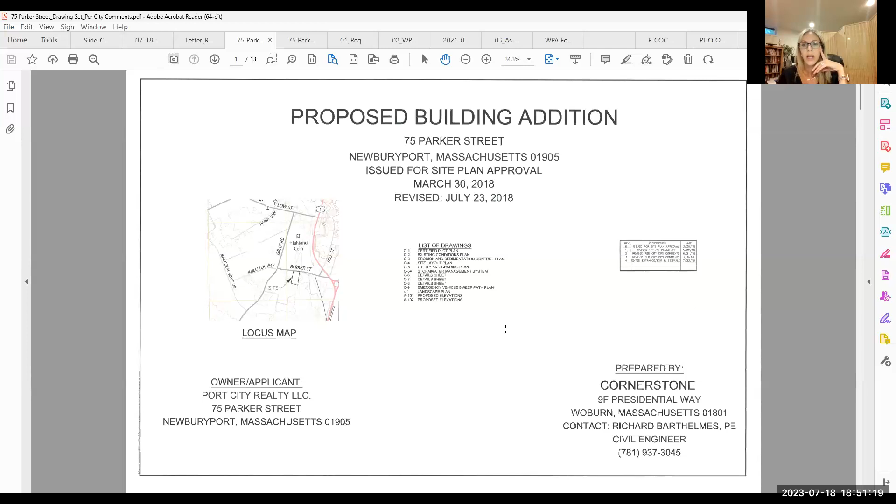So Julia, is this the property that was going to be turned into something different by the brewery? No, that's 79 Parker Street. Oh okay, it's a good question because they're really close to each other. This is 75, an existing building. Here's the parcel. 79 is further up Parker Street on the corner, there's White House and that whole building.

This is just an existing 1-story concrete block building that they wanted to put an addition on and add parking and stormwater management. So it's a much smaller project. Here's the proposed. This is the existing, and here's the proposed. There's going to be a building addition in the back.

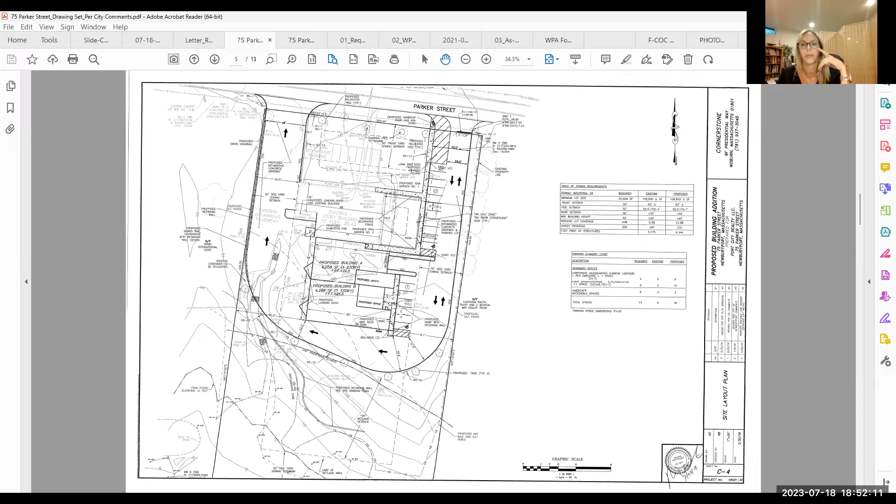Again, nothing has changed. This is still exactly what they want to do. They just, because of various reasons including COVID, weren't able to start and are hoping to start now. So rather than make them refile all of this, we have the order of conditions. They're asking if we can retroactively extend it to when they did the planning board. So they're only asking for a 2-year extension, but I would recommend that we give them a full 3-year extension.

Was this Bob Germanara's land? I think this was the Germanara property, if I remember correctly, but I don't think he's involved in this. So it's a car repair place now.

So if we're doing a retroactive extension, should we go back to when it was, should the 3 years start back when the other one expired? I actually calculated when it would have expired, given the tolling period, the COVID period, which would have been November 28th, 2022. So that's when we can date the extension.

It would be extended 3 years from then. Okay, well that's fine by me.

We need a motion to do the extension. So moved. Second. Roll call: Steve Moore, yes. David Vine, yes. Carol Wagon, yes. Dan Warshaw, yes. I vote yes.

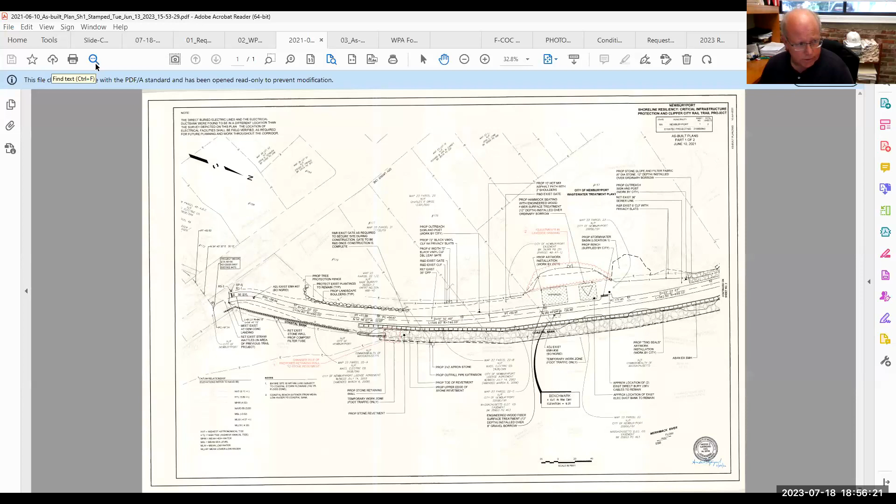16 feet of it was actually changed from a wall to a stone revetment. That was because during construction, it was discovered that the buried electrical line, I believe a 13 kV line, was really close to the excavation. So in order to avoid disrupting that utility, that change was made in the field. So that was one change.

There was a little bit of landside grading right off the top of the path that was done to incorporate a flatter area that was graded to incorporate the shipwreck structure, and then a hammock seating that was done during construction. So that was the second minor change.

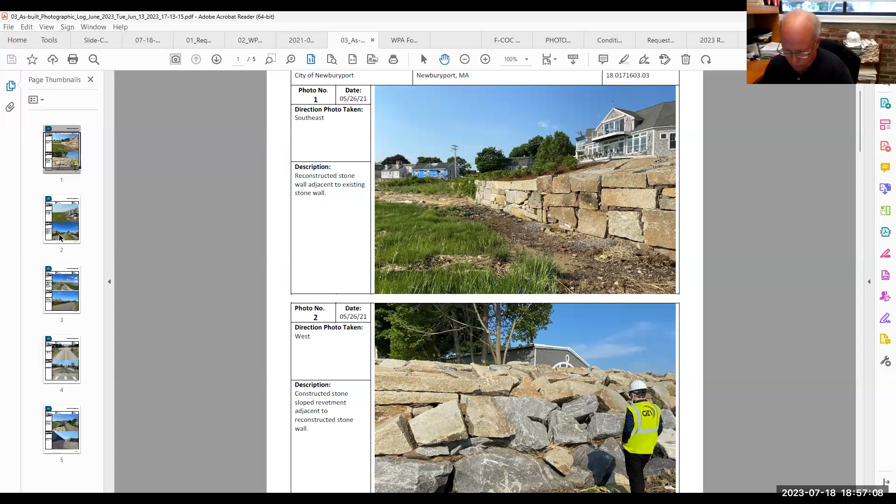And then the third one was the stormwater basin located on the land side of the walkway. That was adjusted by having some crushed stone fabric put in, and then also on the land side slope, that was also stabilized with fabric and crushed stone. I think that's what you see right in that photograph, photo 10.

So with that, the city's looking to close out this project. Okay, anybody got any questions? So this doesn't include the extension over off of Parker Street? Is that considered a separate project? That's correct. This is not included in that work.

Okay, I'll make a motion to issue the certificate of compliance. Second. Roll call: Steve Moore, yes. David Vine, yes. Carol Wagon, yes. Dan Warshaw, yes, and I vote yes. Thank you. All right, thank you.

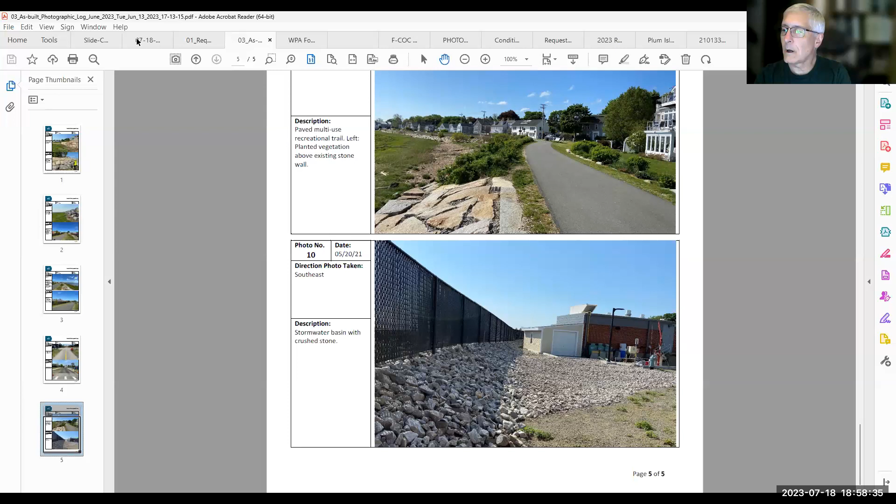Okay, next item. Robert Wolsick, Strem Chemical, Mulliken Way, request certificate of compliance.

Okay, that's the wrong one. Here we go. Let's see, we've got Matt Steinell here. Matt, I'm going to move you to be a panelist. Matt can explain this project to you guys, which I think was done quite successfully.

Good evening, Matt. Good evening.

For the record, Matt Steinell from Millennium Engineering, here tonight representing the applicant Strem Chemicals in their request for the certificate of compliance. The commission may recall we were back before you a couple years ago with an application to install a new transformer pad and transformer on the paved surface next to the building, and then a conduit was going to be excavated connecting an existing utility pole on the property to that new transformer. Recently we were contacted by Strem to come out and do the as-built, as they had indicated the work had been completed. And when we did the as-built, we found a couple minor deviations from the plan.

But when I spoke with the engineer in the office, Brian, he said he had been aware of these changes as they were happening, and had communicated some of this information to the commission through their agent. Before you tonight is the as-built plan. And the deviations that I'll point out, I don't know if you can see my cursor, or if it's Julia's screen that you're seeing, want to show me where to zoom in?

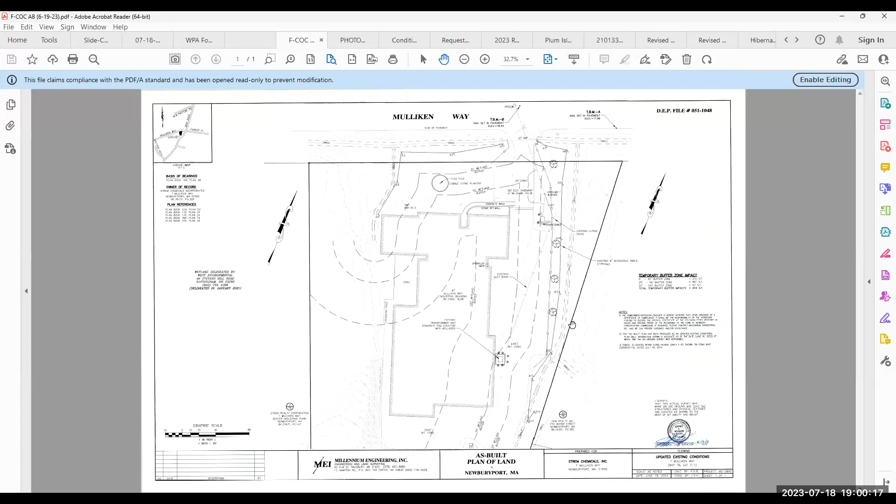I can, just to that right-hand side of the building there. Yep. Perfect. So kind of to the lower part of the screen there, you can see the square where the transformer is. Originally, that was about 15 feet towards the north of where it is. In the photo package that we submitted, I think what happened was there wasn't enough thought put into the placement of that proposed pad. And in one of the pictures, you can see there's actually a door there. So I think they just had to shift it in order to not block the door. And so that pad got shifted, kind of toward the bottom of the screen there, about 15 feet away from that corner of the building.

In addition to that, when the utility company came out to actually make the connection, they determined it was necessary not to come off of the existing utility pole there. So there is another transformer just a little bit further up. Right here. Right there, yep, there's a transformer there. And just behind that, they installed a new utility pole where the conduit was originally going to come off the pole a little bit north of that and cut in front of that transformer. Now it's overhead to the new utility pole and then comes behind that transformer through the paved section.

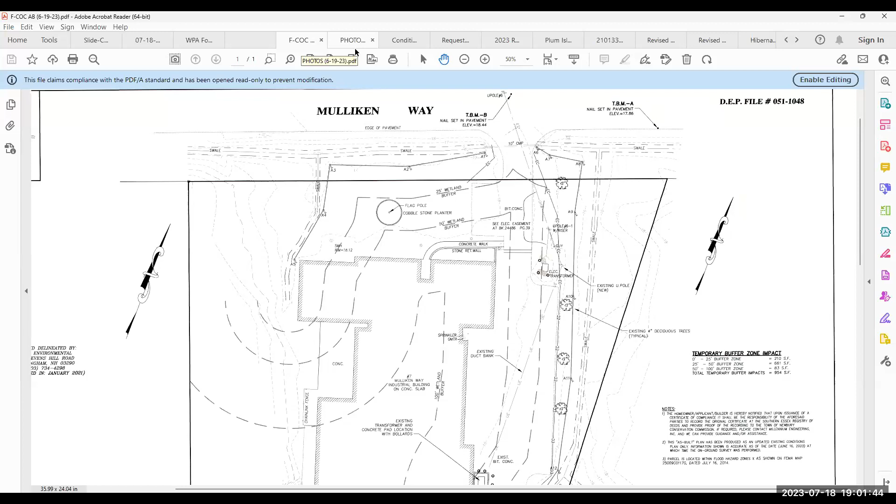So the two major deviations are the 15-foot shift in the pad and the installation of a new utility pole that was needed to satisfy the utility company's requirements. Beyond that, the impacts are relatively the same. It's a trench through the paved area. When they were done, they repaved it.

You can see in that bottom photo there. And in that top photo, it's a little hard to see, but if you look just to the right of the green transformer, you can see the open door there.

Beyond that, I'm happy to answer any questions, but it appears to be done in reasonable close conformance with the plan.

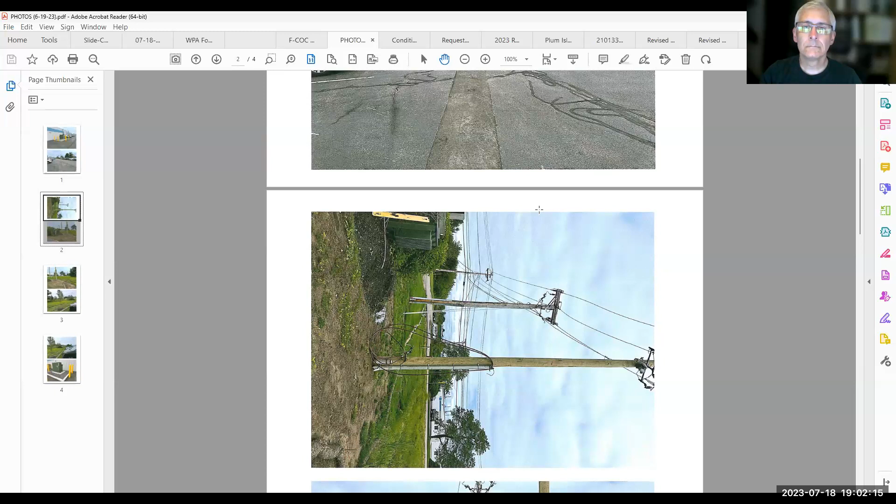Okay. Anybody? Motion to issue the certificate of compliance? Second. All right, roll call.

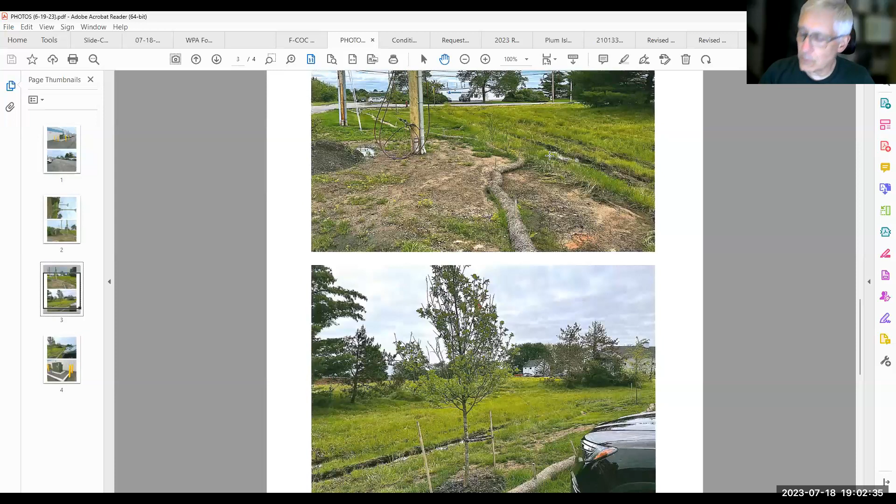Steve Moore, yes. David Vine, yes. Carol Wagon, yes. Dan Warshaw, yes, and I vote yes. Thank you.

All right, next item, David Smith, GZA Environmental Inc., 0 North Reservation Terrace, Plum Island Beach. Request for certificate of compliance.

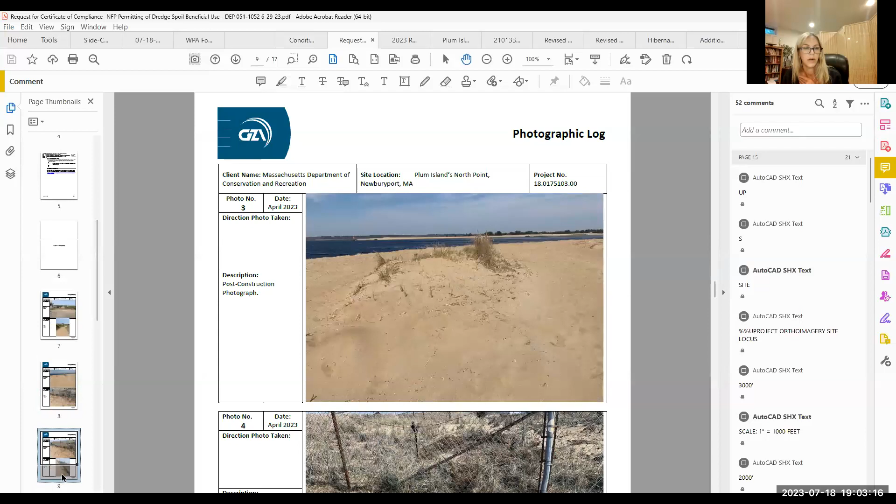Yes, okay, so here we go. David's already still over here. Is there anybody else we need? I don't think so, again. Okay, so David, I've got the request, I've got the photos and your whole application, your whole request here. You can just let me know how you want to quickly run through this.

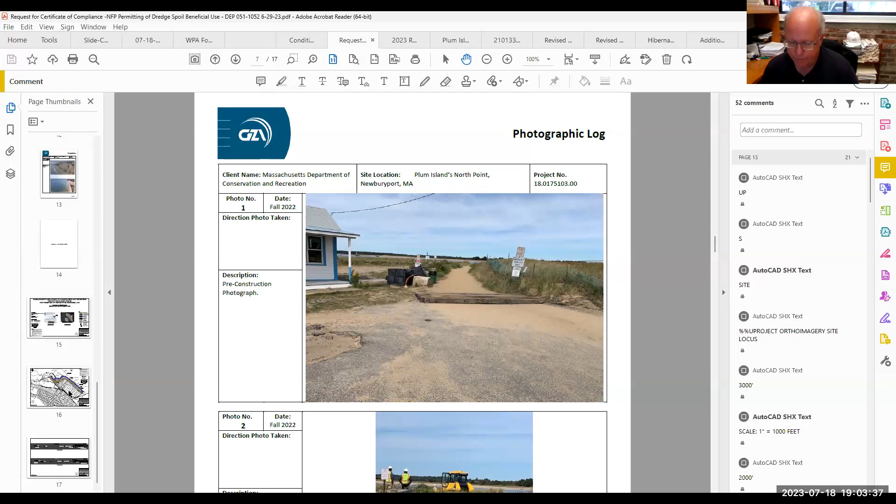Sure, thanks Julia. David Smith from GZA, 144 Elm Street in Amesbury, here representing the Massachusetts Department of Conservation and Recreation, DCR, for the non-federal sponsor or non-federal project permitting of dredge spoils beneficial use. So this is the dredging project at North Point, Plum Island.

The project was completed on or around April 7th of 2023, and an as-built was required as part of the order of conditions. So we went out there and performed an as-built survey shortly after the completion of the project, and that's submitted as part of this request for certificate of compliance.

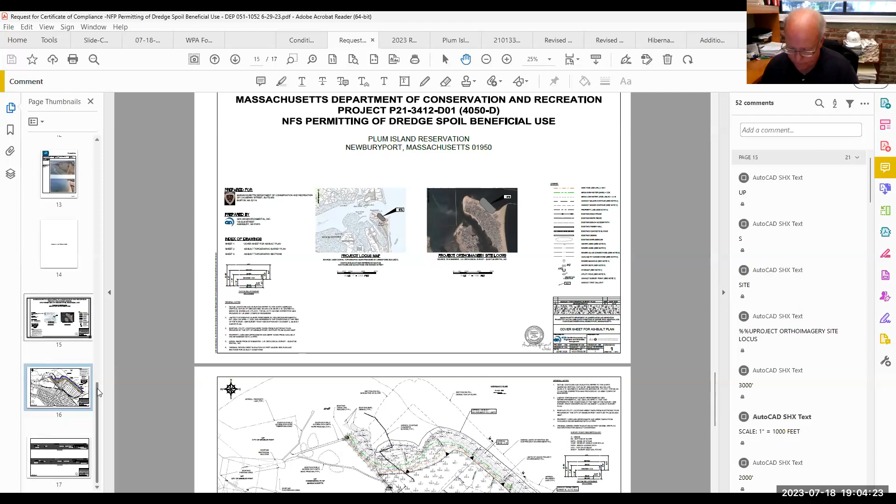In addition, in the cover letter there were notes of some deviations, one of which, and I think most folks will know this from being involved in this project for many years, is that originally it was 290,000 cubic yards of sediment that was going to be dredged and placed at North Point. From the Army Corps of Engineers, their volumes totaled 214,625 yards, so it was a reduction of a little over 75,000 cubic yards. That's the first change that occurred.

The second change is that the Army Corps of Engineers, if you recall, this is an Army Corps dredging project, and their project was to dispose of the dredge spoils behind the South Jetty Spur. DCR was the non-federal proponent to take the rest of the material, the dredge material, and place it further beyond the Corps' project limits, basically what you see in the drawing in front of you.

The Corps, during the course of the project, increased the elevation of this nourished area. It was originally proposed to be at elevation 6.5, NAVD 88 datum. They raised it 2 feet. So with that, there was a reduction in overall square footage of the nourished area, and that was also reflected because of the reduction in volume.

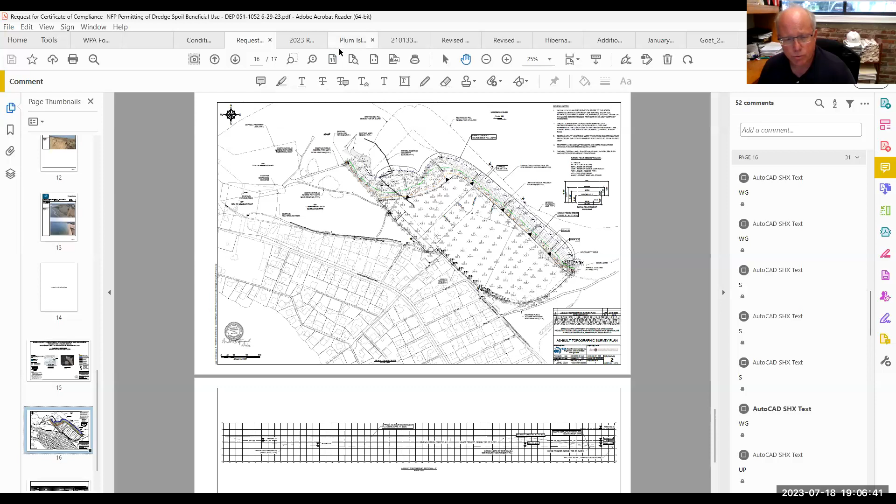This was brought up in a meeting during construction, attended by Julia, and we're just basically capturing this as the certificate of compliance. The Army Corps of Engineers, I believe, also provided the pre and post-construction plans and photographs, the same photographs we've included with our application, and I believe they also included that in the submission to the city's Conservation Commission as well. So with that, we're just requesting to close out this order of conditions.

Do you have any idea how much of what they put there has disappeared already? Unfortunately, I don't. We only did the as-built survey shortly after they completed the work. We only have that survey data. We have not surveyed it afterwards.

Is there any downside to the certificate of compliance, in that if any other work has to be done here, would it be through the previous order of conditions for the bags and stone project, or is that one still open? Is there any reason not to complete this or the other one? I'm not sure, Dave, about the old one, if that order is still open or not. I would imagine it's probably since expired. Any future work is going to have a new filing.

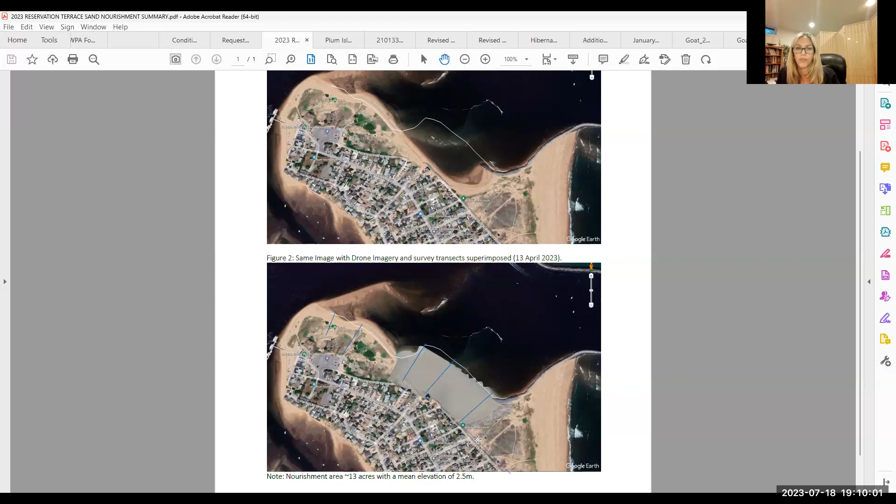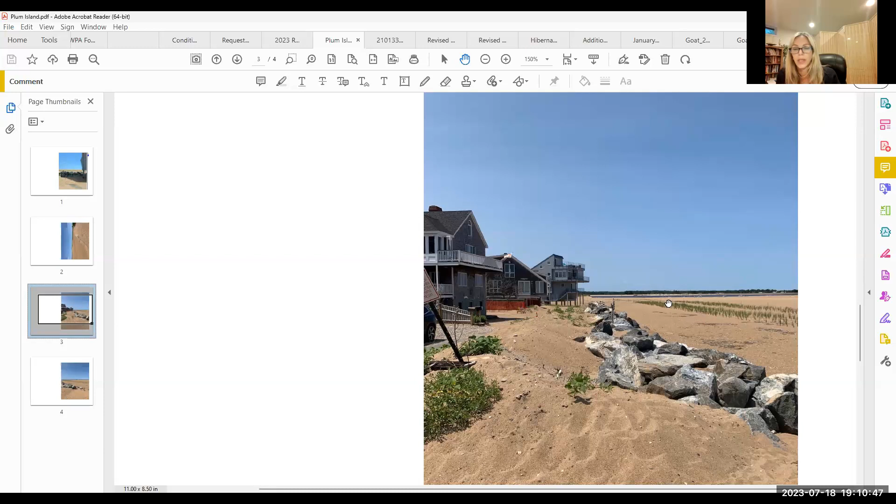Let me see if I can get another picture — sorry these are so off center. Here again, the plantings have been coming in, nice and green and healthy. And here's just another shot of that. But it is pretty flat, and this high tide does come up pretty high, so we'll have to just keep our fingers crossed.

I'll make a motion to issue the certificate of compliance. Second. All right, roll call: Steve Moore, yes; David Vine, yes; Carol Wagon, yes; Dan Warshall, yes; and I vote yes.

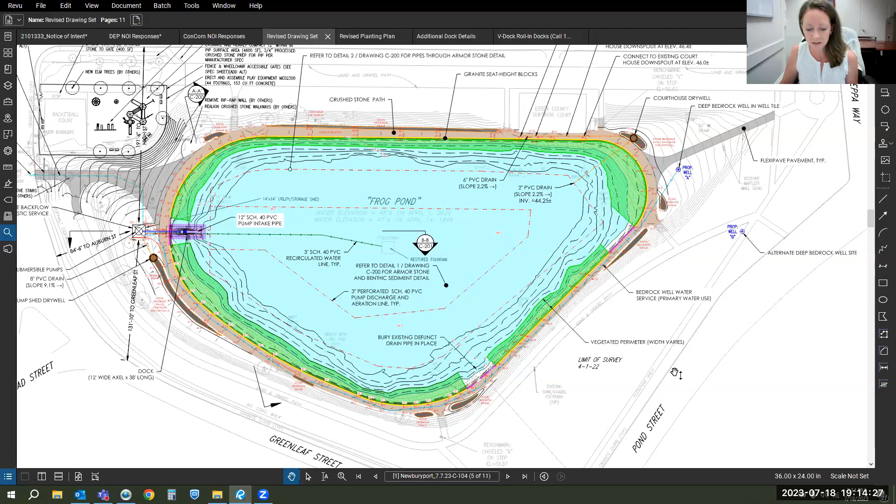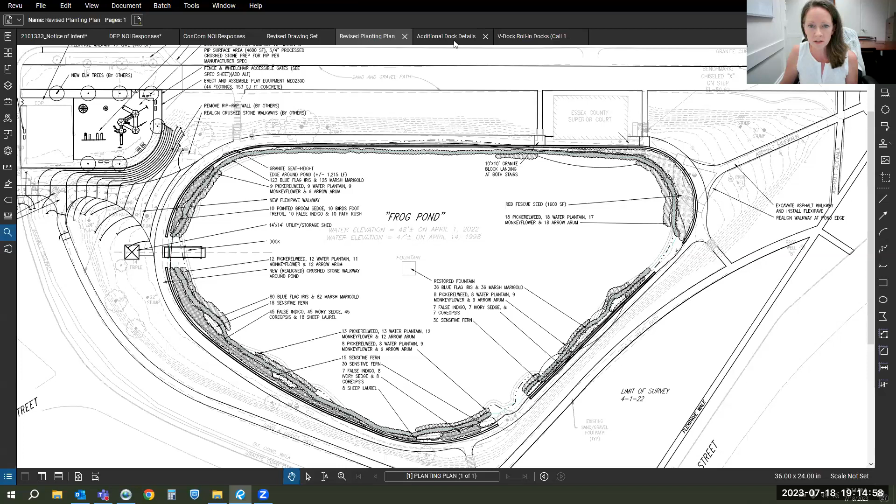I'll hold that piece for now if you have questions. The second item requested by the commission is the revised planting plan, and this more or less directly responds to the grading. Last time you saw colored bands of species indicated by elevations above the water level. This is a little bit greater detail, still utilizing all the same planting species proposed last time, but giving more detail as to exactly where they're going to be placed. The final item requested was additional dock details, so we've provided that information in the packet.

We also have a video that shows how the dock is moved in and out of the pond, if there's any desire to see how that's going to work. But in trying not to take too much of the commission's time, I'll leave it at that for now, and we're open to any additional questions or details you might request.

I'm still curious how the dock and the axle for the wheels is going to clear the intake pipe. Krista, do you have that detail that shows the cross section? What sheet is that on? That's our first detail sheet.

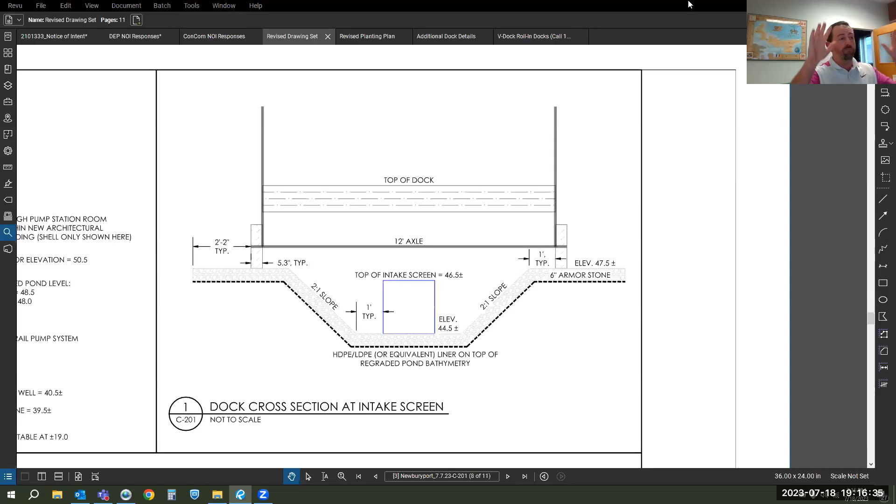So what we did, and again this was something we presented earlier at more of a 20% construction document level, and now we're a lot closer to 100%, since the intent is to go to bid as quickly as we can. The intent is that we've sunken in the intake screen and pipe so that it falls below the axle. Then basically there's a ramp that straddles the intake screen, and the ramp is above the intake screen itself. So if you could zoom out a little bit.

Yeah, and then scroll over further to the right. So there's a ramp that actually exists, and if you zoom in a little further, thank you. So what we've done is graded the pond such that the wheels are not on a track, but on an ample ramp of stone on either side, and the intake pipe is set back inside this ramp. So as we pull the dock out and push it back into the pond, the wheels will straddle the intake pipe but also stay above it, so the wheels stay on the stone ramp that's higher than the intake notch or niche we've created in the grading plan, so the axle doesn't hit the top of the pipe or the intake screen itself.

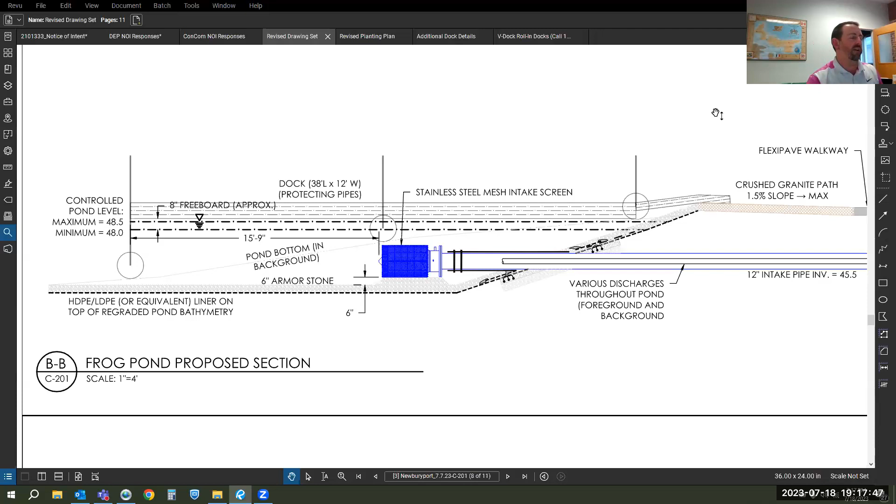If you go a couple sheets back, actually, right here, perfect. You can see this is a graded niche where the intake pipe is set back into the slope closer to the edge, but we have a ramp that is stone lined, the same stone we're proposing to ballast the liner on. That stone will act as a ramp to pull the roll-in dock in and out.

So after reviewing this, we took it to heart and looked at it really intently. We came up with a pretty good solution, I believe, where we can protect the intake pipe and screen with this sheath of stone, and the outer edge, which is higher than the intake pipe and screen, will easily slide in and out of the pond, straddling and going over the intake pipe without the axle hitting the intake screen or pipe itself.

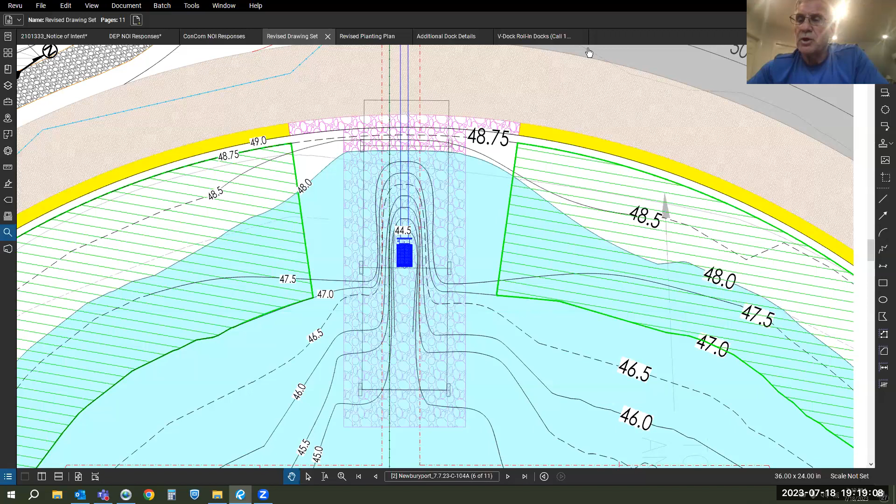Okay, and what would be the mechanism I saw on one of your earlier slides, something about 1,400 pounds or so? Is there going to be like a come-along that goes with this? I think it's time to cue the video. I'd like to see the video. Is it okay if I play a YouTube video for all you folks? Somebody give me a wave if the audio isn't working.

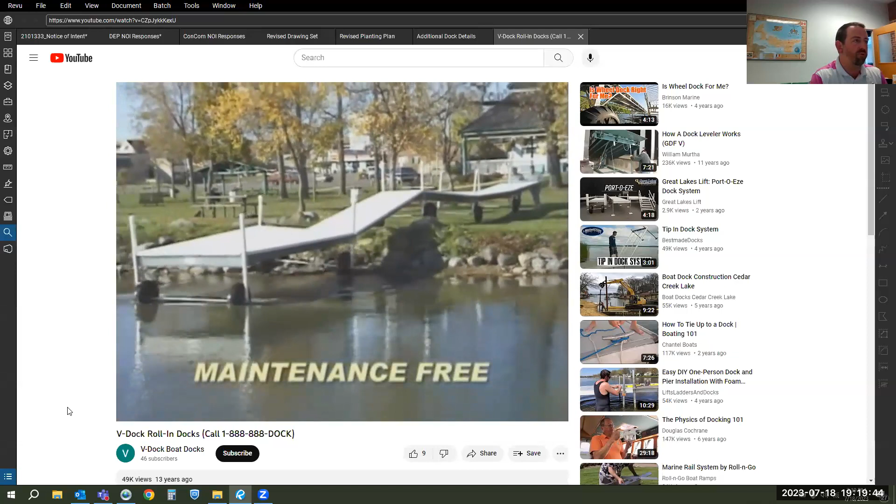So it's easily pushed in, there's two people doing that. It's hinged and on rolling wheels so they're rugged and can slide in, and those wheels would slide on the stone ramp we're proposing on either side of the intake pipe. Once the dock is in, it gets locked in place.

Needed the audio. I figured our discussion would be more important than their advertisement.

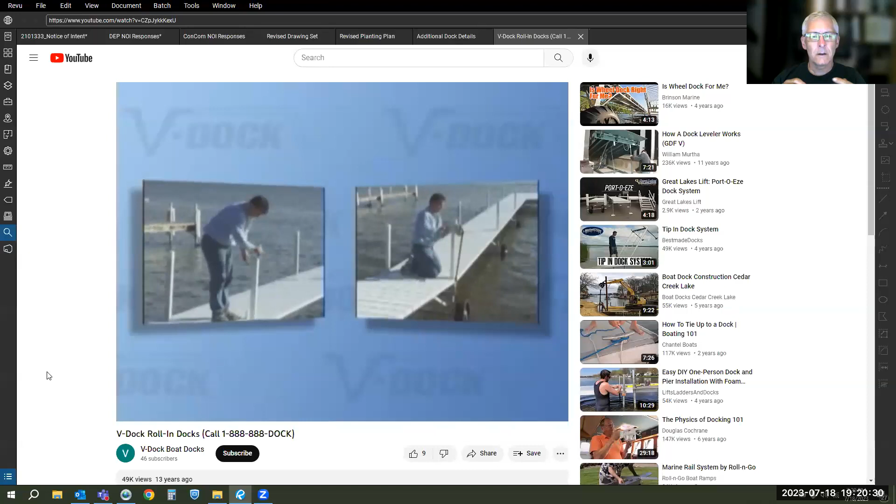Okay, one question I have is the stone ramps - won't they start settling and or falling over with multiple runs of this dock back in and out?

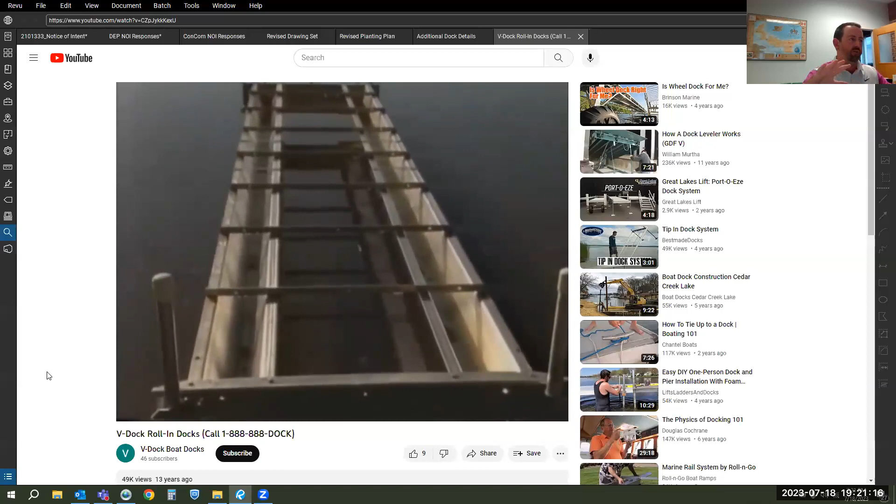Well, there would only be 2 runs in and out per year, so it's not repeated to the point where there would be significant fatigue, so to speak. That section in particular would be reinforced with additional stone so that it's not just a thin layer. It's graded and filled in a way at that location to withstand the force of the rolling of that dock on that ramp.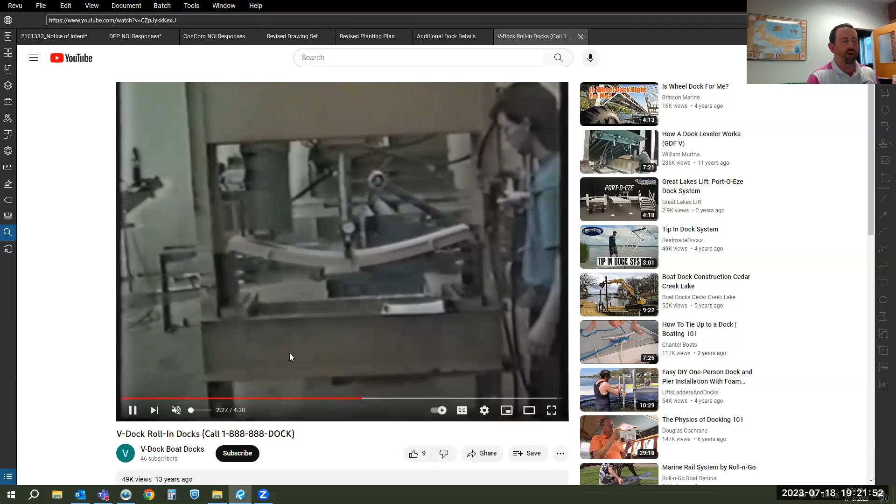It's a wide enough track so it's not like the wheels are right on it - there's enough stone to cover the wheels, and it's not like it's on a fixed track. There's enough give and play, horizontally speaking, to wheel this ramp in. So I don't expect it to rut out or slough off, especially because of its weight, how the weight's distributed, and because the wheels are wide and can distribute the weight properly. So I don't see that as an issue here.

Okay. Do you think that now that the intake is below the level of the bottom, sort of submerged, that debris will accumulate that will need to be removed?

So it's actually not at the bottom itself - the intake is not at the bottom. The bottom of the pond itself is still 6 inches below that. So the cross section we saw on the other one, that's the cross section through the screen itself. There's actually still 6 inches of freeboard, or space, between the bottom of the intake screen and the actual pond bottom.

We added additional stone underneath the intake screen itself to help as a support, so that it didn't have that cantilever detail we had before - that was one of the comments we needed to address originally. We have a concrete seepage collar within the slope itself. The intake screen is supported by an additional 6-inch thick layer of armor stone, but it's set above so that it's not taking in muck, and it wouldn't take muck in this area anyway, since it's more stone as opposed to the benthic sand layer we're proposing throughout the rest of the pond.

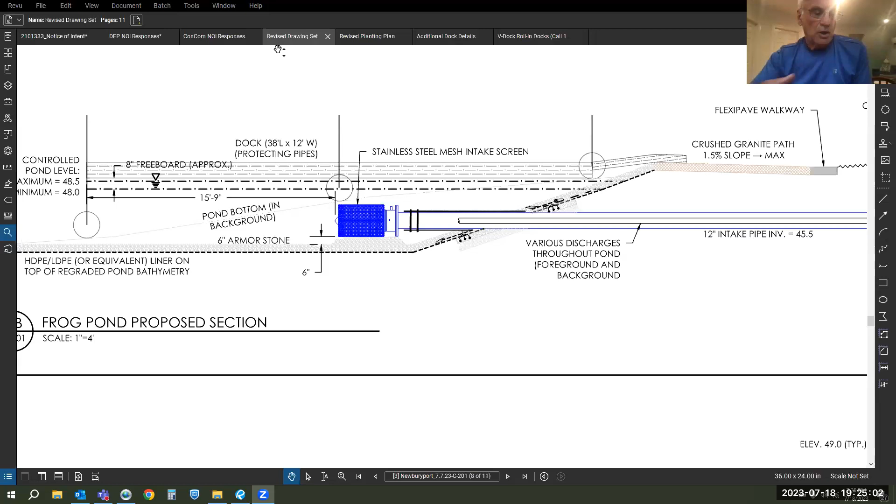Okay. There's no problem with the geometry of this as far as where you're going to bring the vehicle to pull it out - there's ample flat area. A second question was about where it was going to be stored.

I'm not sure, I don't have an answer as far as where it's going to be stored. That would be stored at DPS - it would be part of the city. If it's DPS, Kim, then that's where it is.

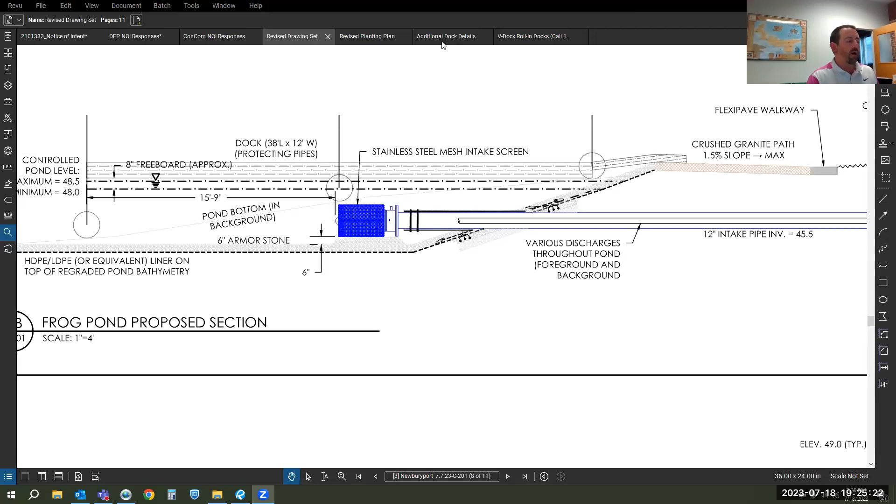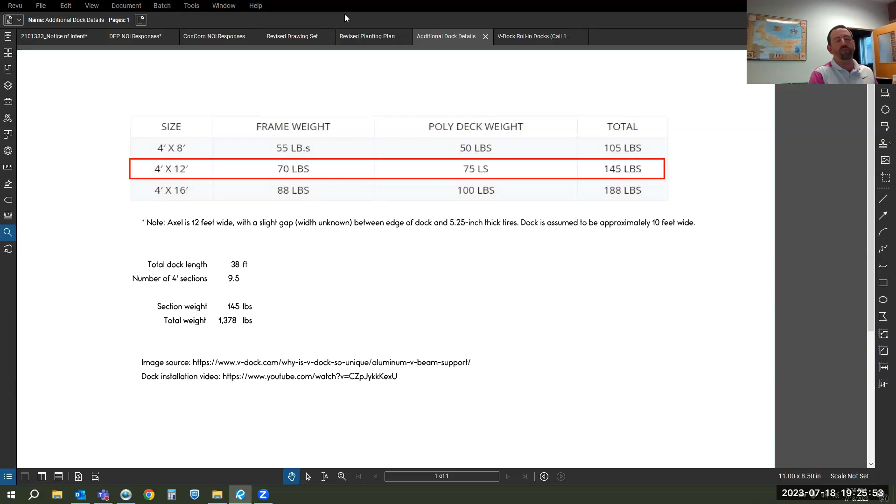From a geometry standpoint, the dock system itself folds up so that as it's extracted and pulled up, the sections can be folded to be stored as it's being extracted. It could also be disconnected and reconnected, the segments - yeah, they're segmented as well. So if it's a matter of trying to pull it out in one fell swoop, it can be done that way with a hinge, or it can be separated as well.

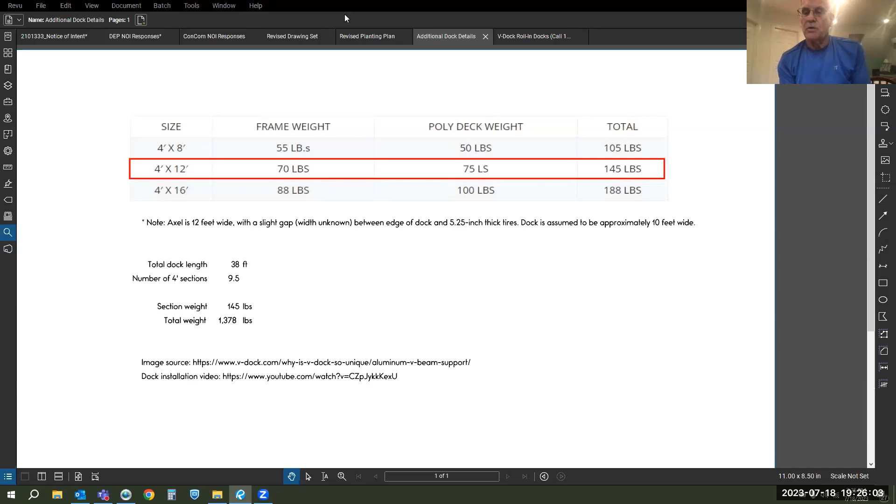And the city is all set on the program for the dock and how we're going to get to utilize it and so forth. Yes, you have a letter from DPS in the packet from Wayne Amaral from the last time around.

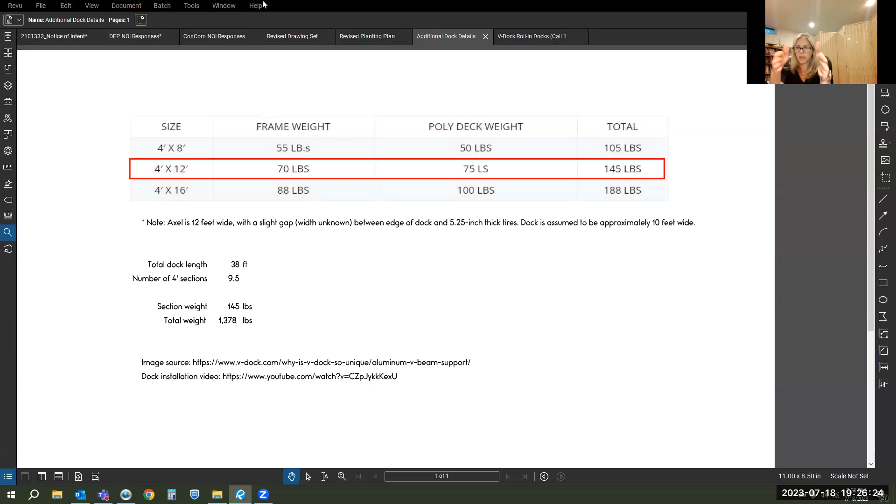I have a related question about the intake and the niche that's been created for the dock to go down. I'm imagining it's not going to be sucking a lot of debris up against it, but say in the fall when leaves are falling and landing in the pond, since this is a narrow niche, if things start to accumulate and block the flow of water through the intake, is there some mechanism where we would know that's happening? Would an alarm go off if there's a restriction in flow through the intake pipe?

Absolutely, that's a great question. The way the city would be alerted through the online platform is that if there were an obstruction in the intake screen, say debris or leaves block it, the wet well inside would start to drop in water level because the flow from the pond couldn't keep up with demand from pumping. There's a liquid level sensor inside the wet well itself, and if that fell below a prescribed level, it would trigger an alarm to stop pumping. Whoever's managing the system would receive the alert and know there's an issue with the intake screen. There are methods to clean it out, such as surging water back out.

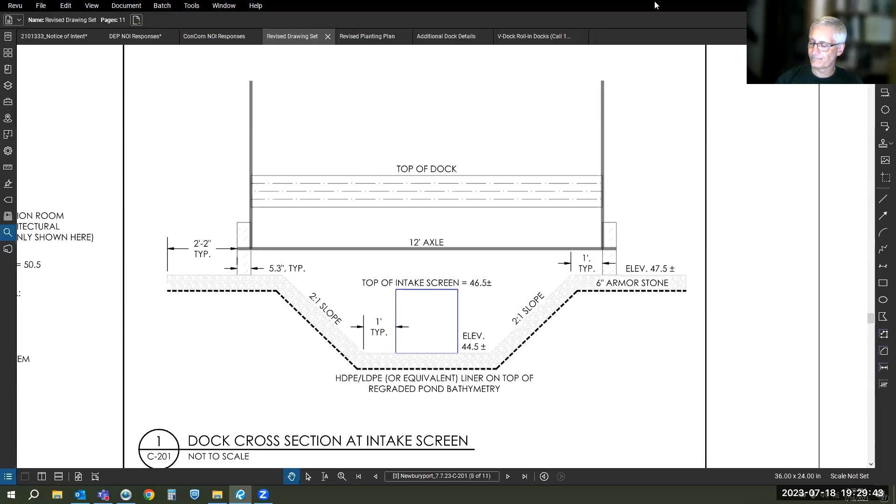I'll make a motion to close the public hearing. There is a variance request that goes along with this that you all would have to vote on before actually closing. Oh, correct. And I do have a copy. I drafted the variance, so I have a copy of it if you want to give it a quick look and then vote on it.

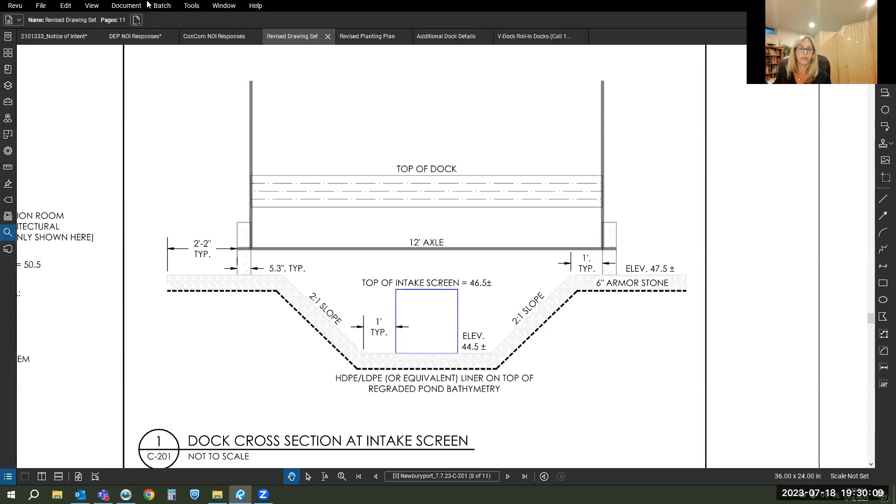I can share my screen again.

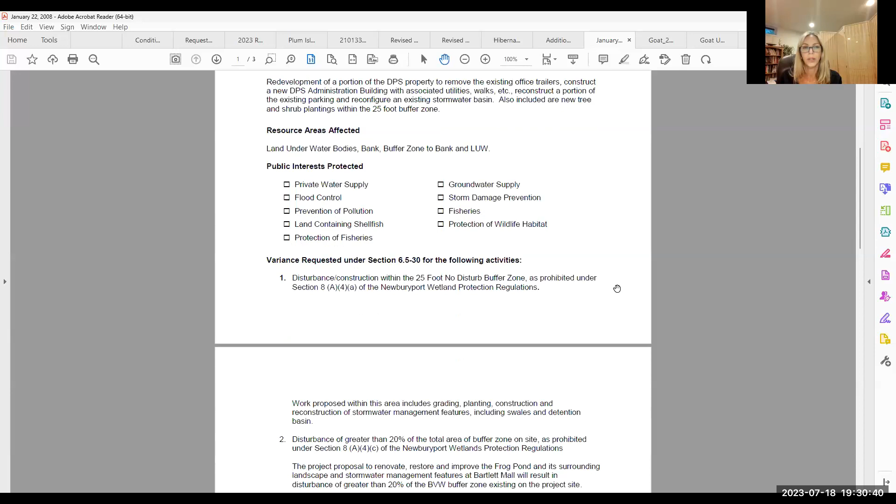Here we go, so this would be the variance. Resource areas affected: land under water bodies, bank, buffer zone, bank, and land under water. So the variance is requested under 6.5-30 for the following activities: disturbance of construction within the 25-foot no-disturb buffer zone, disturbance of greater than 20% of the total area of buffer zone on site, direct impacts to bank, and direct impacts to land under water, which is the pond, in section 8A4 of our regulations.

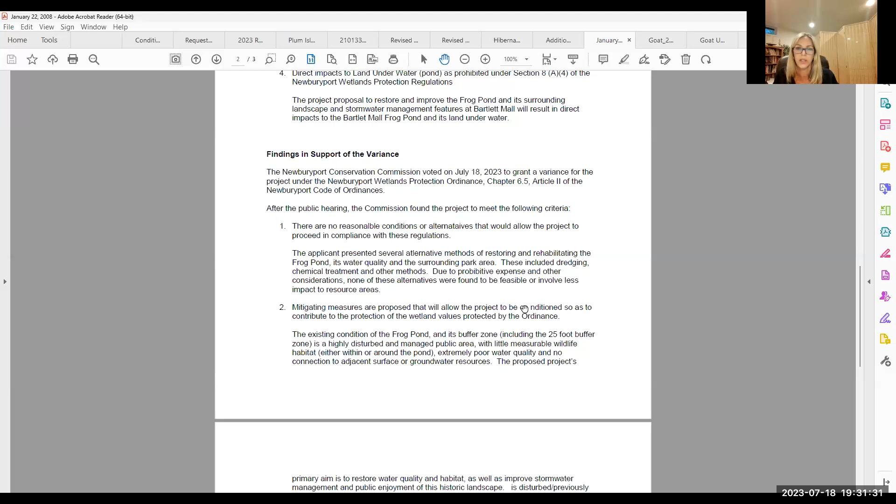The findings in support of the variance are that there are no reasonable conditions or alternatives that would allow the project to proceed in compliance with these regulations. We've already gone through their alternatives analysis in the earlier hearings. Two mitigating measures are proposed to allow the project to be conditioned so as to contribute to the protection of wetland values protected by the ordinance.

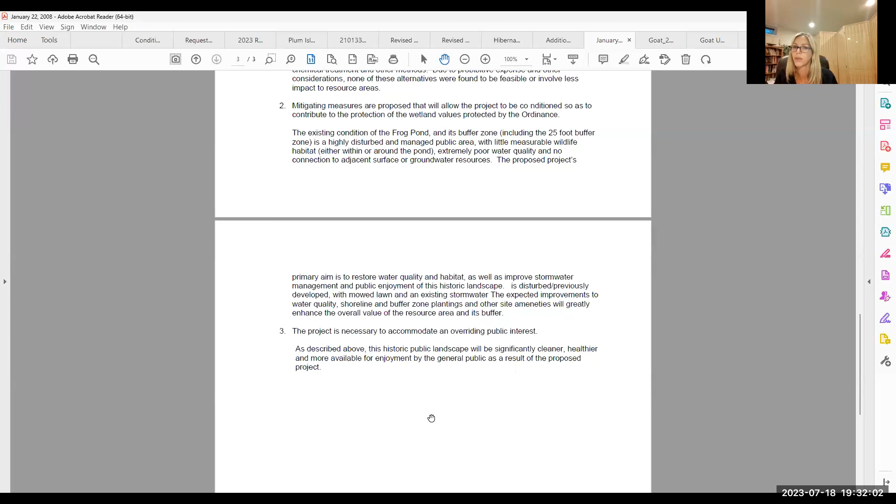As we know, this is a restoration project, so it's entirely mitigation. Essentially, the whole project aims to improve the conditions of the resource areas, and the project is necessary to accommodate an overriding public interest. As described above, this historic public landscape will be significantly cleaner, healthier, and more available for enjoyment by the general public as a result of this project. So that would be the variance.

Do we have any questions on that? So do you need us to make a motion to accept the variance as written?

As amended, with my edited corrections. All right, so moved. Second. Roll call: Steve Moore, yes. David Vine, yes. Carol Wagon, yes. Dan Warshall, yes, and I vote yes.

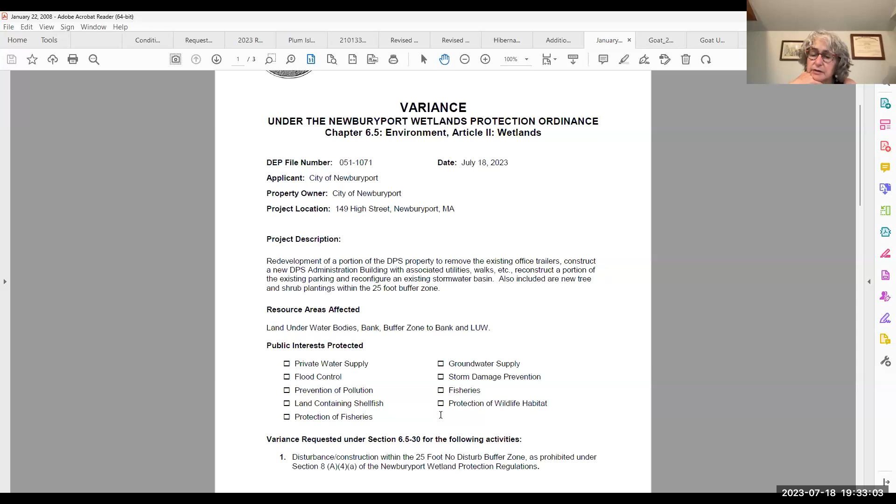Back to the closing of the public hearings. We got a second on all that, right? I think we did. I don't think you got a second. What's that? I seconded. You seconded, okay. All right, roll call: Steve Moore, yes. David Vine, yes. Carol Wagon, yes. Dan Warshall, yes, and I vote yes.

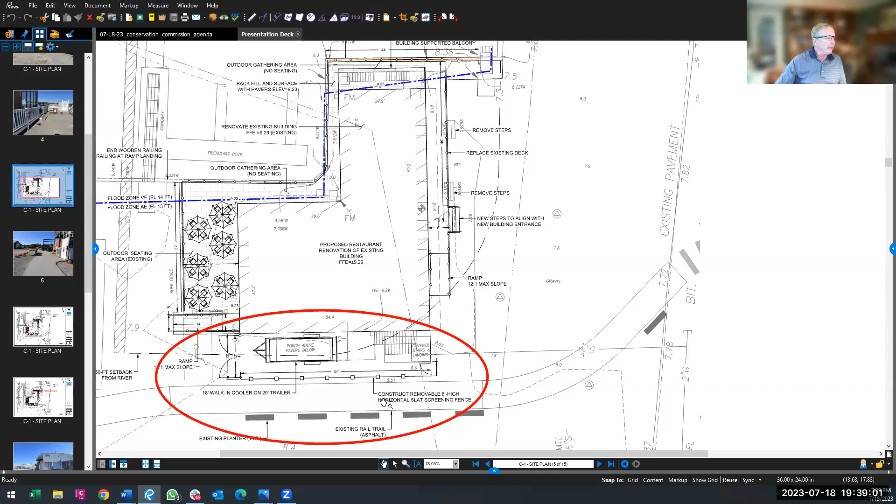The purpose of the fence is screening, because where this is located, looking east, this is the Newburyport Harbor Walk that was put in coordination with the DEP to provide public access through this area. It was worked through a few years ago. This is the walk, it's got some planters and that type of thing, so where the cooler would go would be in this area, and we're looking to provide the screening to basically separate the back of the house of the goat operations from the public walkway.

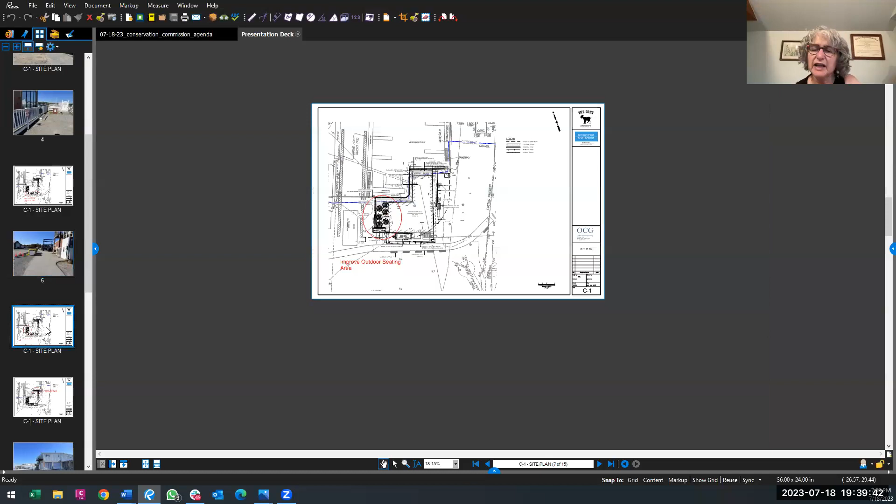So that is piece 2. Piece 3, zooming back in, is improving the outdoor seating area.

This outdoor seating area is the same area that was— hang on a second, okay. Carol, you got a question?

Yeah, just before I lose the thought, you said there'd be screening in front of the walk-in freezer. What kind of screening are you talking about, plants or something else? We're looking at a solid fence. Oh, a solid fence? Yep, okay.

Chris, did you have any more? Any more detail on what the intent is on that? That's okay, I just wondered, when you said they would be screened off, I was envisioning trees.

So we're showing on the plan that we're calling for constructing a removable 8-foot high horizontal slat screening fence. Okay, let's see. All right, okay, move on. What else is on this—is there one?

Any setback or anything else that's associated with the Harbor Walk, because it looks pretty close to it? Property wise?

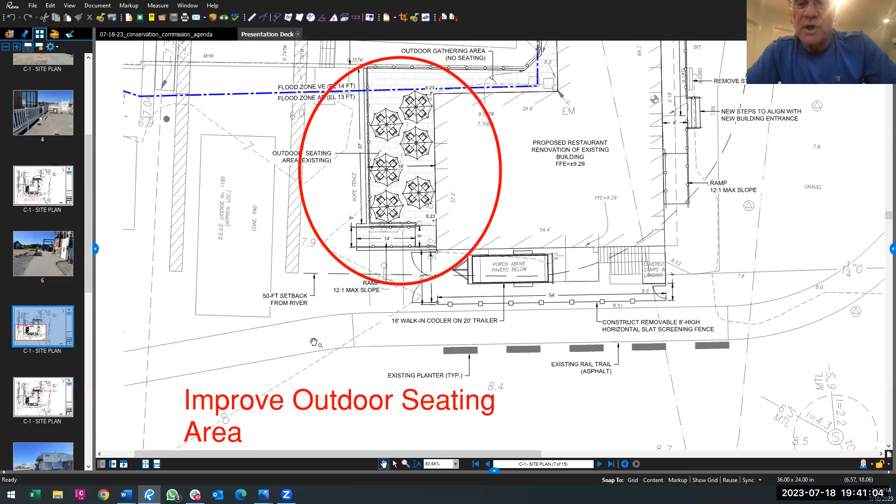Well, the harbor walk is existing. Right, but what I'm saying is sometimes there's additional setbacks for fences. I just want to make sure that's all on your property and not city. I think the property continues out further—didn't you have the tax map up at the beginning of this? Oh yeah, I actually think the walkway is on their property, not the city's. I'm not quite sure. It's sort of just a public right of way through there, because of chapter 91 and those issues. So this is only being looked at by zoning. Okay, so the only easement is the trail itself. Okay, right. Okay.

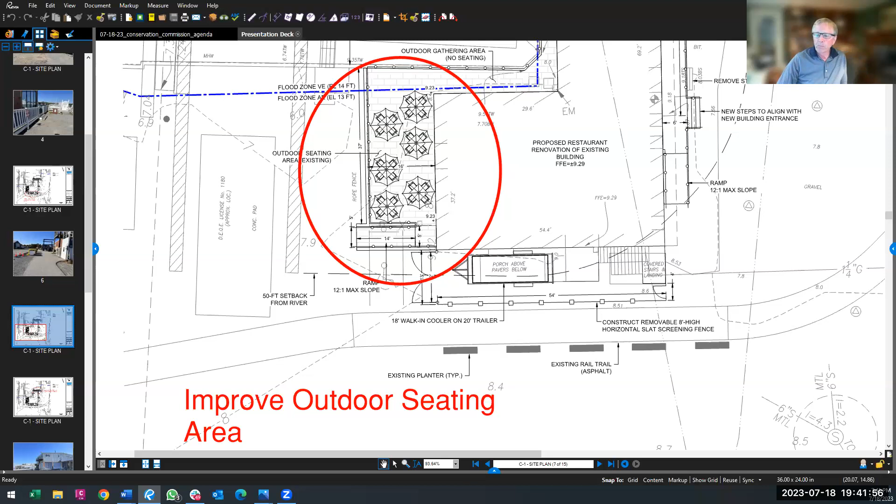All right, back to piece 3. This would be the outdoor seating area. Again, this is an enhancement of what's been there most recently for Plum Island Coffee Roasters, the same general shape and size. The improvements proposed are to bring the grade up to be generally consistent with the floor level of the building, so it will be built up slightly. We're providing a ramp here, necessary for accessibility purposes, and a fence around it. We're looking to finish this area with pavers that go in conjunction with part number 5, which I'll get to shortly. Basically this is improving the seating area that was formerly occupied by Plum Island Coffee Roasters.

The next one, and this is where it gets a little more technical—I've got a bunch of pictures—we are looking to repair and raise the bulkhead to match the adjacent sections. And with this is piece number 5, which is also raising the grade there and extending the pavers through to have an area for outdoor gathering.

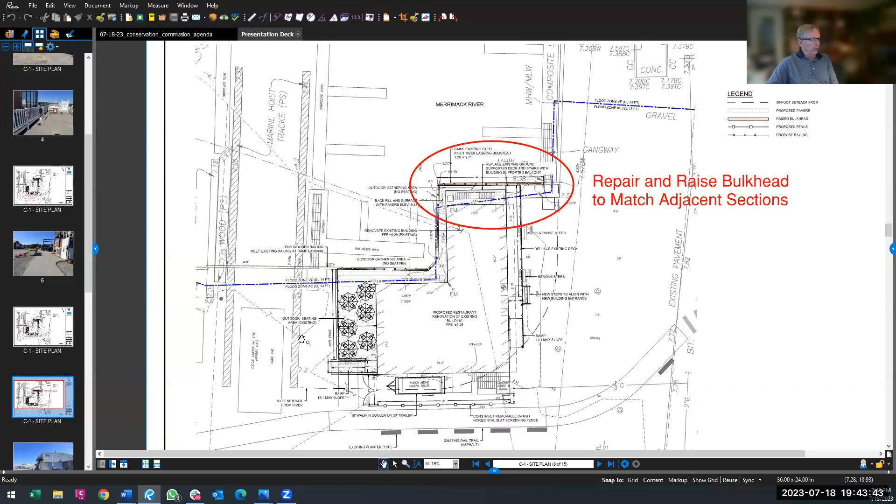So it would be an area that's open to the public. To wrap your head around this, I've got some details, but they're a little hard to read. I think this is probably the easiest way to see what we're talking about.

As you're coming from windward and the travel lift, we have a top of the bulkhead, and then it drops down by a foot or more to a lower elevation running across the building. This picture is a little bit old, but you can see that the floor elevation of the building is lower than the top of the higher section of the bulkhead, but higher than the top of the lower section of the bulkhead.

Basically everything in there is shown in the next thing, and this is looking the same direction. It's a bit of a mess, basically not safe to walk through here because there's broken bits of concrete, remnants of former variations of the bulkhead, and other artifacts from the history of what's going on here.

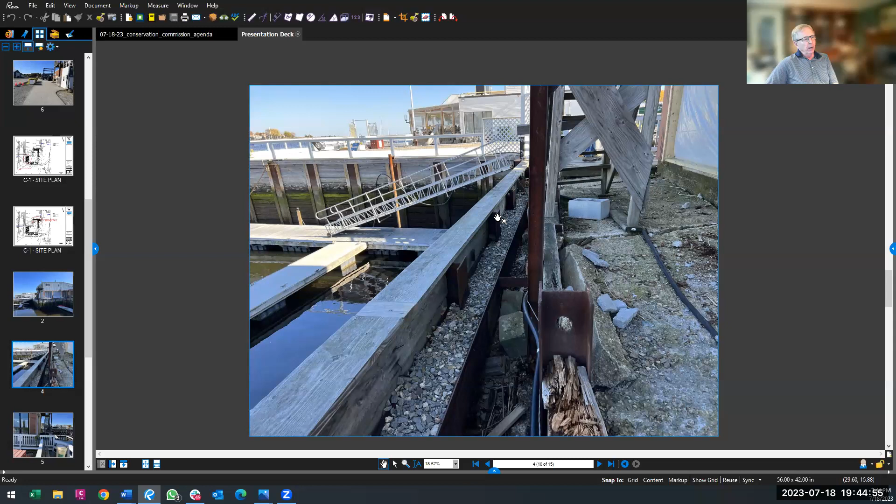So the intent would be to raise the top of this — these are steel piles with timber lagging in between — extend the steel piles and bring the lagging up to be consistent with the wall beyond it. There's a detail on the second sheet, or I can get into that if we want to.

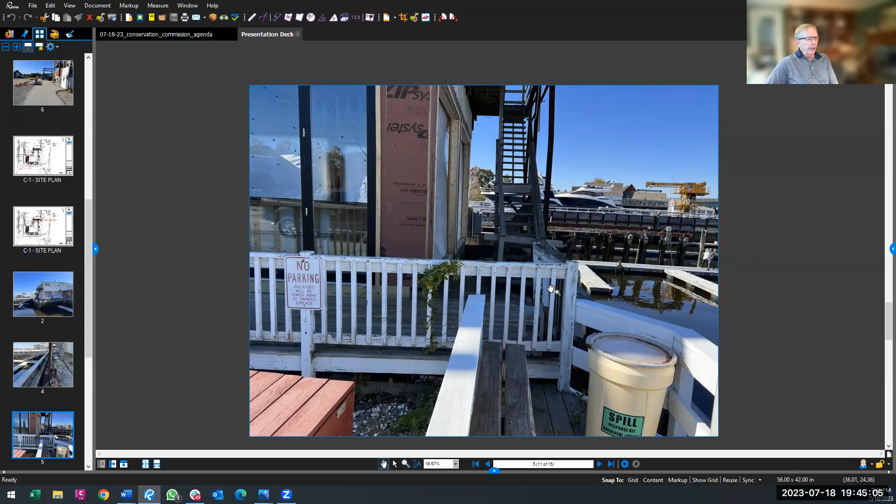This is then, looking back the other way towards windward, you can see we have the stairway here up to the deck above, which is basically in disrepair and probably unsafe. All of that will be removed.

We will be replacing the deck up on the upper level, but it's going to be supported with triangular braces off the side of the building, so that all of these columns and structures supports that extend down will be removed, and the staircase will be removed, so it'll be clear to the sky above, with the exception of the balcony itself and the supports mounted to the building.

And this is then looking back into the corner, where we have this higher edge here, and then it drops down. So this will be brought up to a suitable grade elevation and backfilled up to match the floor of the building.

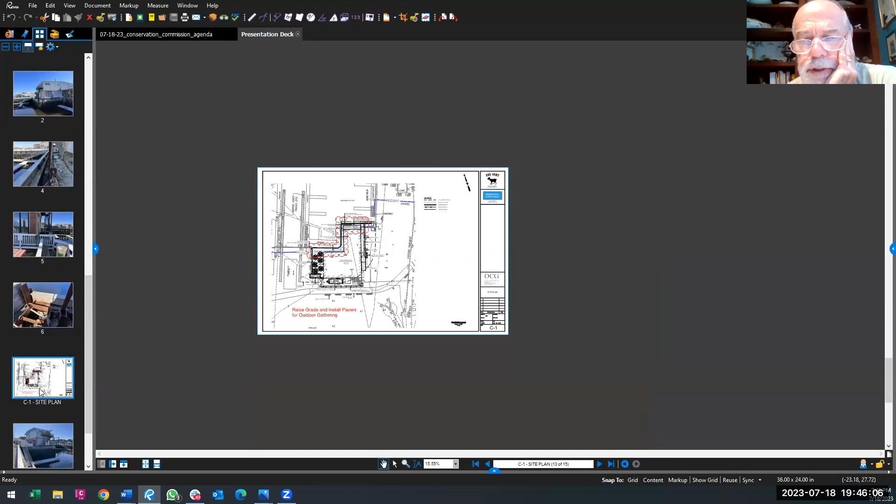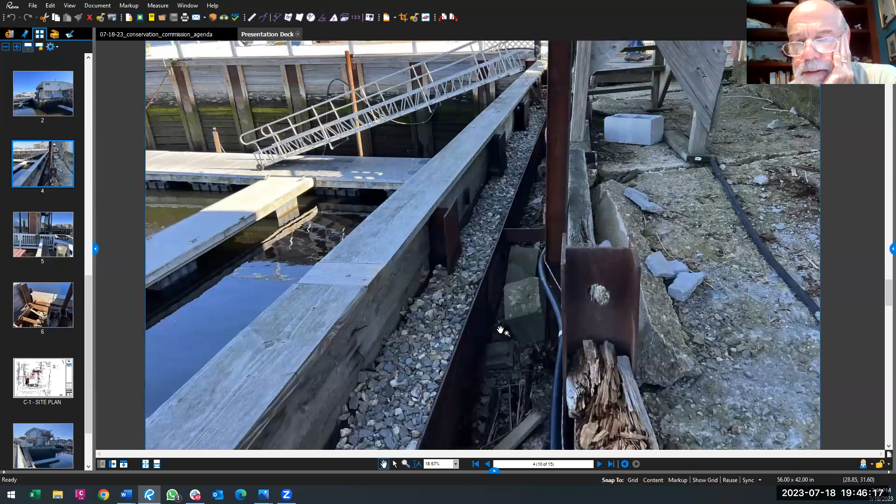Okay, can you go back two pictures just for a minute? This one? The next one. Yeah, is there an old bulkhead in there? Yep. So this looks like an old bulkhead here, and then — there's just all kinds of stuff.

I think that the bulkhead was repaired at one point in time by constructing directly in front of what's there. I don't know the full history of it, but looking at it, it certainly appears that these are steel piles with timber lagging in between that were abandoned in favor of the more seaward version. I don't have the exact heights on it, but it certainly looks like this one at one point in time was higher than the new one, which would be more consistent with what we're proposing to do by raising it up.

Okay, so will you be installing new H piles, the steel piles? No, I would envision that what we would do is just weld on and support as necessary extensions to the existing ones. I mean, we're only coming up — I can bring the detail — we're only coming up like 18 inches or something like that. There'd be no reason to replace the piles.

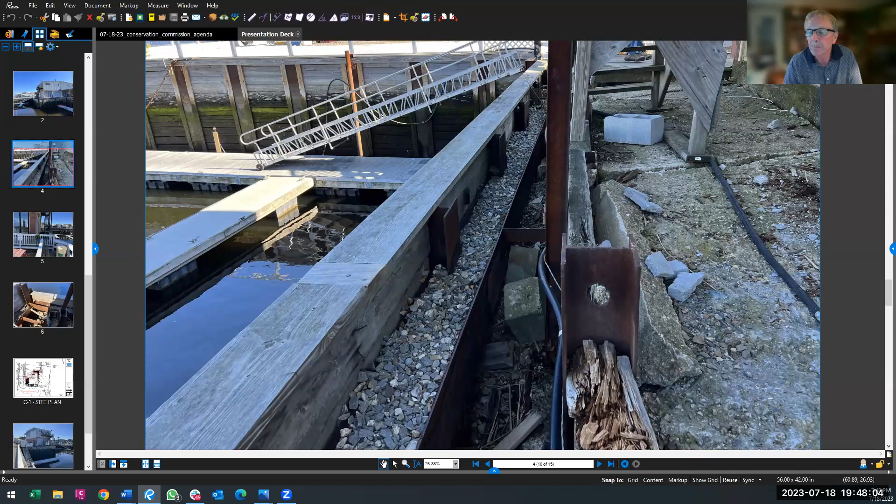How about the flowable fill? Can you explain that operation? I'm not sure I can, because we're getting into a little bit of means and methods here, but the flowable fill — to place it in here is what we'd like to do, just because it would minimize the potential for the erosion that's happened here. I think that what's happened is because these materials are granular in nature, they've kind of worked their way out through gaps in the timbers and out into the river over a period of time. Because I'm under the impression that there were some voids that carried back towards the building. I didn't know if the flowable fill was for that or just what's shown in this picture. Well, I think it's all of the above.

Okay, so where's the mechanism to go on the other side of the bulkhead? Is there going to be excavation to track these down, or what?

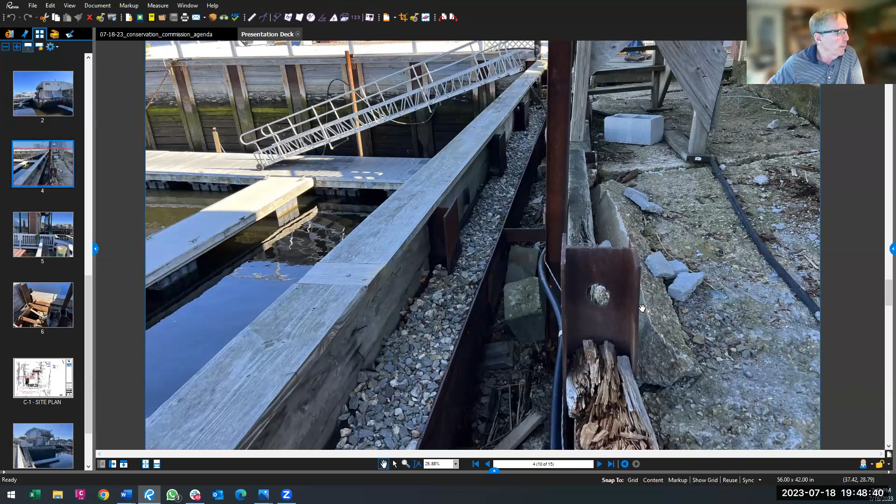Well, I think we'd come in and we would remove the debris. I have a section in here that would, so this is a general depiction of the broken concrete slab and the basing and things like that. We would be looking to, I think it would probably make sense to take out some of the loose pieces of debris like the slab, and then put the flowable fill in on top of it.

You had mentioned a public walkway, allowing the public to get out there. Is there going to be signage and so forth on that? There could be. Was that something you decided yourselves, or is that something the state was requiring? We've basically intended to build it that way, so we decided it ourselves. We haven't made any provisions for signage, but that doesn't mean we couldn't do so.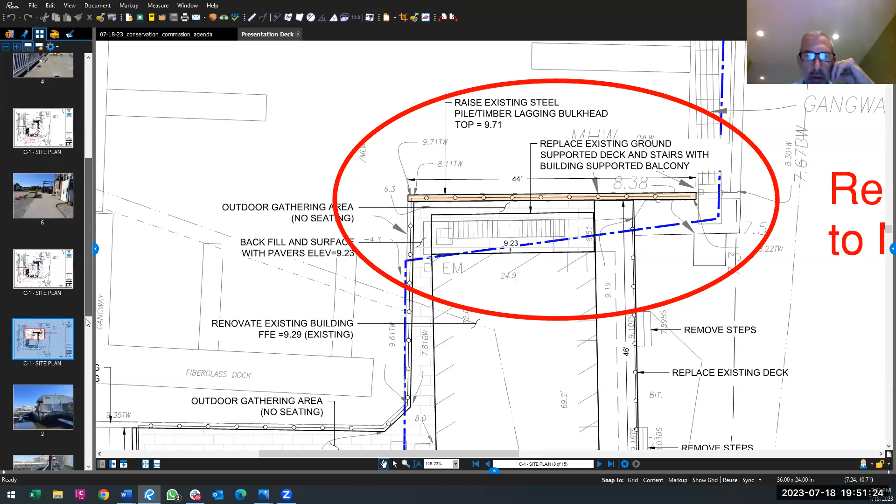Paul, I didn't notice on the detail plan, will there be a railing? Yes, there's a railing. So, just to wrap it up, item 5 is just raising this to grade with the pavers, okay? And I have that as a separate item, but yes, we're proposing to add in wood railing with cable balusters.

You'd need it because what you have here is that the top of the pavers is at 9.23, and so you're only 6 inches. This is just like a kickboard here at the top of the bulkhead at that elevation, so you'd have to have the railing there so that nobody falls in.

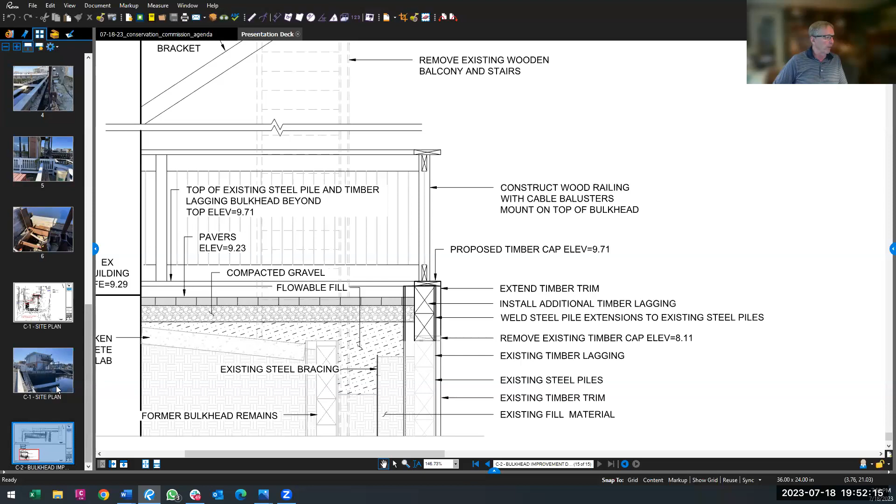And that's consistent with what's already existing down by Windward and the travel lift and all of that. Okay, I think you can see, like in this one here, that this is looking back, that we'd be looking at a different, more robust fence than this, but it's the same idea. You've got the railing there that would extend up to the appropriate height above the finished surface.

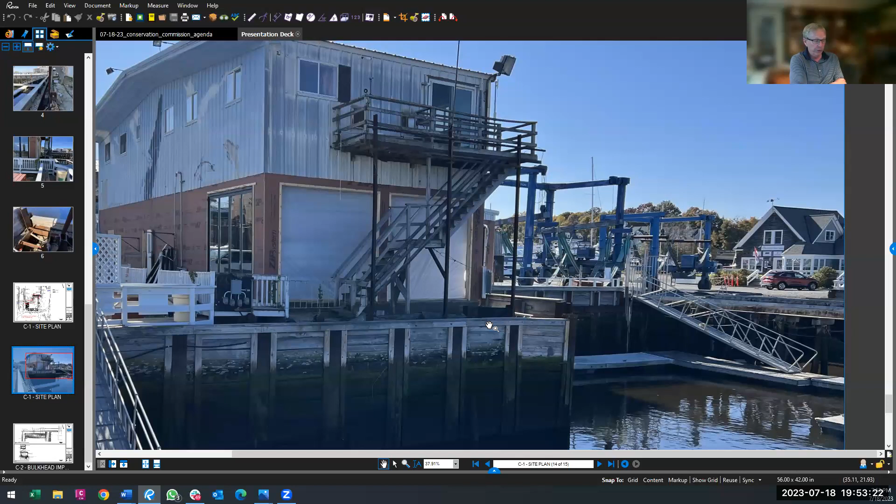Did you have a chance to evaluate the condition of the existing bulkhead onto which you plan to add extensions? Does that appear to be in pretty decent shape? It appears to be in pretty decent shape. I haven't done an assessment of it, and that's not my thing, so I wouldn't be qualified to do it anyway. But I think we probably would look at some of the structural details on exactly how you do the extension, and that probably warrants a bit of an evaluation. But we're not raising it much. Visually it looks like the steel piles are in good shape, the timber lagging is in good shape. It's just everything behind it that's a disaster.

Just to get back to the public access that wraps around the building, would that walk through the outdoor eating area? Yes, it would, as currently proposed. So that would be a little awkward. Well, potentially, yes. To that end, I don't see any reason why we couldn't circumvent that with an opening on this end here, to address that. Okay.

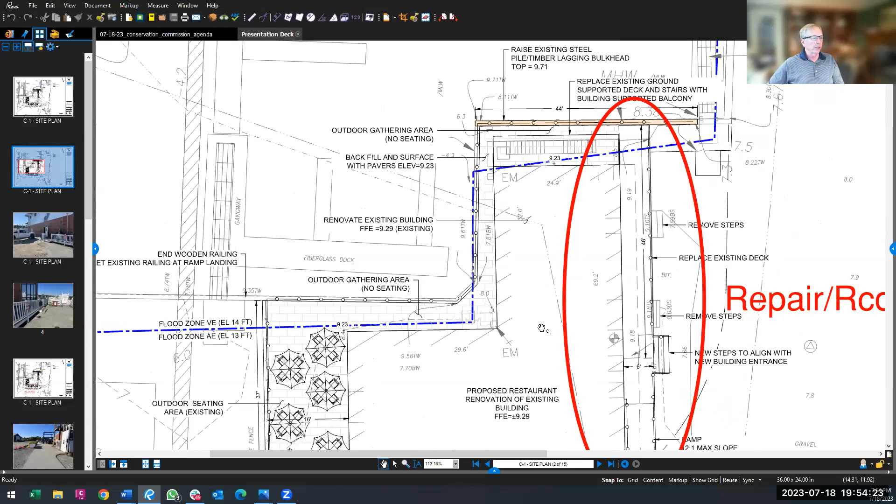Yeah, if you're gonna do it, you may as well not mess with the restaurant, or mess with the rules you can with it. Right, and quite frankly, we talked about it internally that we have an opportunity to do a similar situation here. So right now the access is to go up, like you're walking into the restaurant, either by the steps or by the ramp. I think it would be feasible to make a connection here, which is sort of a landing seating area adjacent to the gazebo and the security gate, down to the marine floats.

Yeah, it seems like there might be a fuzzy line between what's part of the restaurant and what's a public access area. I wasn't thinking of it as public access through there, I was thinking it was public access for patrons of the restaurant. But if it's really public access, that could get tricky, because people at the restaurant might want to stand out there with a drink as part of their experience. But then is it like a public way? Seems a little funny.

All right, well, we've given you something to consider too. How about... I'm sorry, Joe, go ahead.

Any provisions here as far as preventing turbidity during the time this work is going on? You're going to be backfilling, pulling things out of there, you're going to have the flowable fill. Is there anything proposed? At the moment there is not, with the understanding that all of this is behind the existing bulkhead, but that certainly can be added.

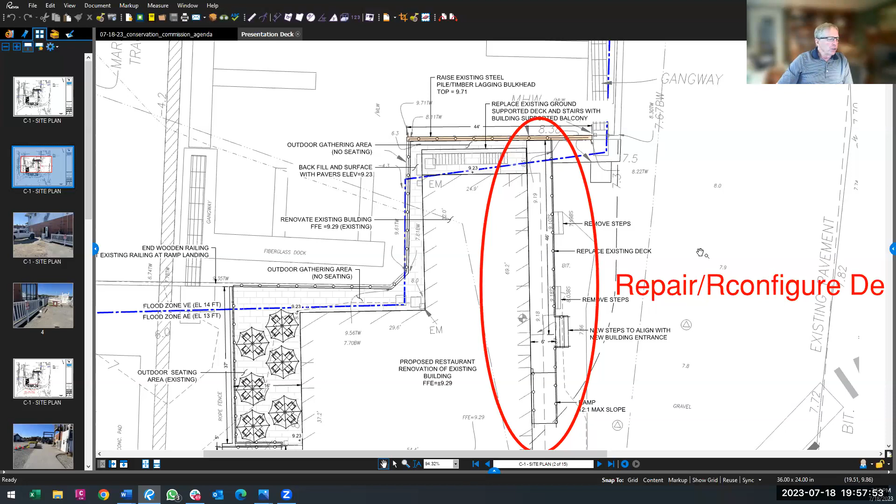Paul, I don't see any utilities going into the building, yet there was utilities that I don't see on these plans. That is a good question. I don't know if utility services were upgraded as part of the renovations or not, or if they were underground or overhead, I don't know the answer to that. Well, they were underground, they went through the parking lot because I saw John Hart doing them. Okay, and at the time I didn't report it, but I'd like to at least see it after the fact and have you show where these utilities are.

Also, I had a couple other things. This is now a riverfront area which wasn't shown in the order or the notice of intent. That wasn't shown, and also I didn't see any proof of the endangered species, natural heritage letter. I think I've got that, if not I will follow up on it. Okay, so... and riverfront.

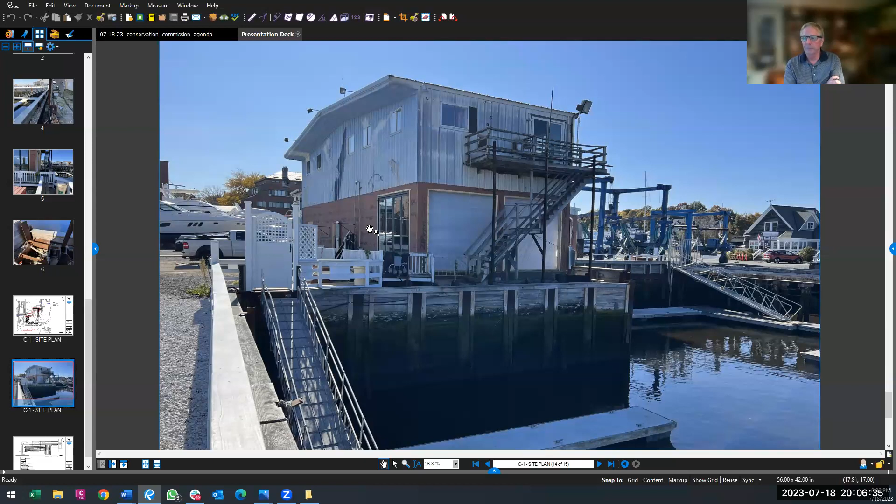So what do we want? I'm of the opinion we should continue it, but- I kind of am too. I would like to see the updated plans and whatever issues listed tonight get addressed. So personally, I'd rather have this continued till August 1st, if you guys think you can get that information to us by then. I can get you the information by then. I'm assuming I gotta figure out what happened with endangered species and that they can be responsive, but I'll track that one down. But yes, that's a reasonable time frame, I think, for what we're looking at here.

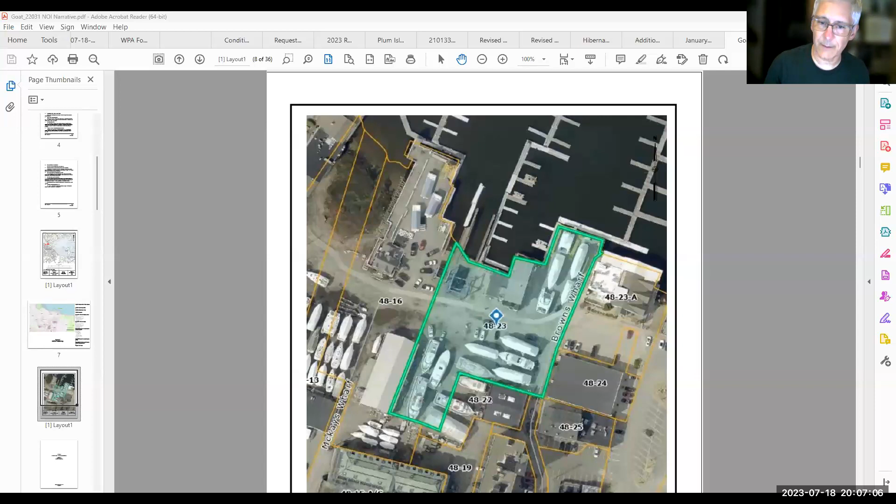Okay, all right, I need a motion to continue to August 1st. So moved. Second. Roll call: Steve Moore, yes. David Vine, yes. Carol Wagon, yes. Dan Warshall, yes. And I vote yes. All right, thank you, see you next time. Thank you, thank you.

Okay, got a motion to close the public hearings. So moved. Second. Roll call: Steve Moore, yes. David Vine, yes. Carol Wagon, yes. Dan Warshall, yes. And I vote yes.

The only order of conditions we have is Kim Turner, City of Newburyport, 149 High Street. Okay, so I prepared a draft special conditions - these are the draft special conditions for an order of conditions, starting with number 19 after the standard ones on the order of conditions form from the Wetlands Protection Act. These are our boilerplate ones. And then we get down, Julia, to-

Can you put that up on the screen? Yeah. Oh, you're not- can't see this? No, sorry. Can you see it now? Yep. Yeah, okay, sorry, I thought it was up there. So these are our special conditions, our boilerplate.

General conditions, we've got a bunch: pre-construction, during construction, and then we have these special conditions, which are the ones we put in additionally based on comments and special requests during the hearing. I went ahead and put in a couple already, which would be prior, and I think we've talked about these over the course of the first few hearings.

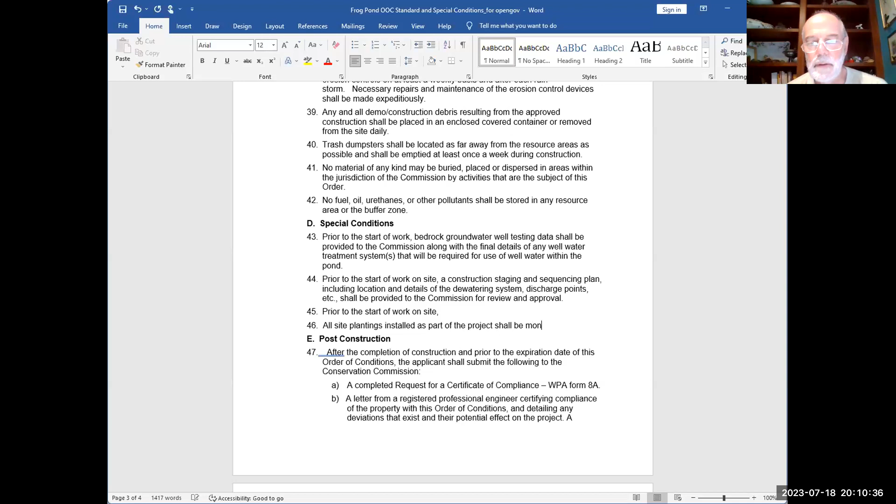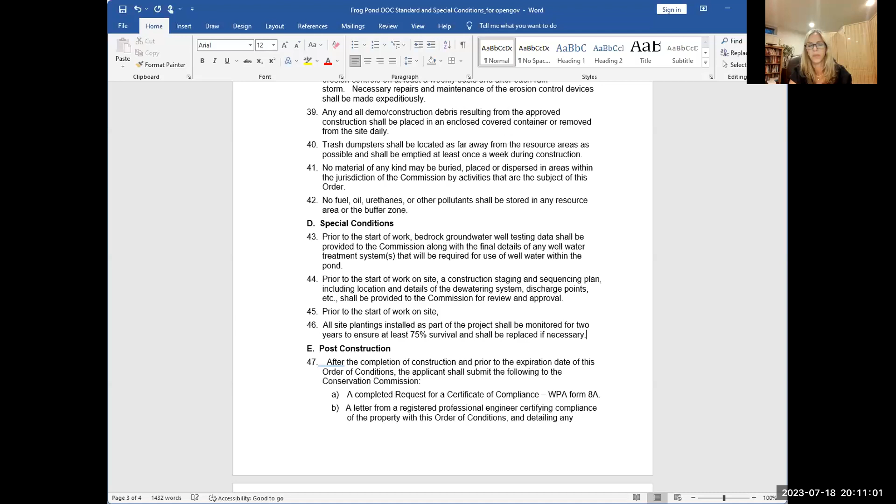But let's just call this: all site plantings shall be installed immediately after construction. Well, let's say all site plantings installed as part of the project will be monitored for 2 years or something like that, and measure at least 75% survival. Anything else? That looks good.

Is there something in there about the wildlife? They mentioned something about one of the pictures, where they were going to be—I didn't follow it, but I know we talked about that before. It wasn't clear what they were going to do about the animals currently there, about moving them. My understanding was that they consistently told us they would not be responsible for that. Yeah, that's what I thought. So do we just leave it that way then?

I thought they said something referencing some agency, that you couldn't move them or something to that effect. Yeah, maybe they'd have to take custody of them or something. You have room at your house, don't you, Joe? Yeah, I got plenty of wetlands, I can take the turtles.

Yeah, they'll live there. I think part of the hope was that they'd be done with all this construction before things started to hibernate or estivate, and things would be okay. I guess we'll see. They also seemed to imply that if they lost the ones that are there, new ones will come. Yeah, it was sacrificial, I think that was implied. I didn't know if we wanted to say anything about it, but maybe we can't. Well, they're also going to be drawing down the water, giving them an opportunity to escape.

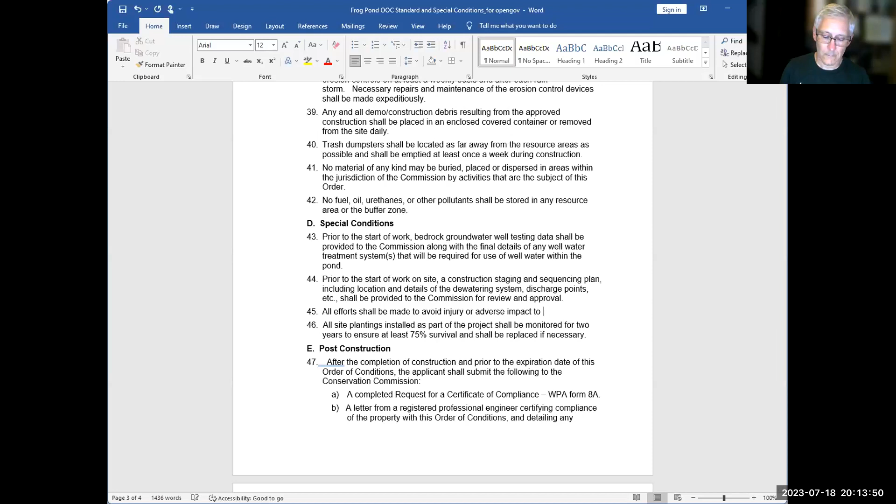I'll have to have a turtle crossing sign on High Street. Yeah, there should be a fox crossing sign too—one ran in front of me on High Street today. Really, during the day? Yep, he looked pretty healthy, moved across pretty quick, waited for an opening and moved pretty quick.

Do we have any other conditions? It's pretty much covered what I was thinking.

Motion to issue the order of conditions. Second. All right, roll call: Steve Moore, yes. David Vine, yes. Carol Wagon, yes. Dan Warshaw, yes. And I vote yes. And there we have it—a new Frog Pond.

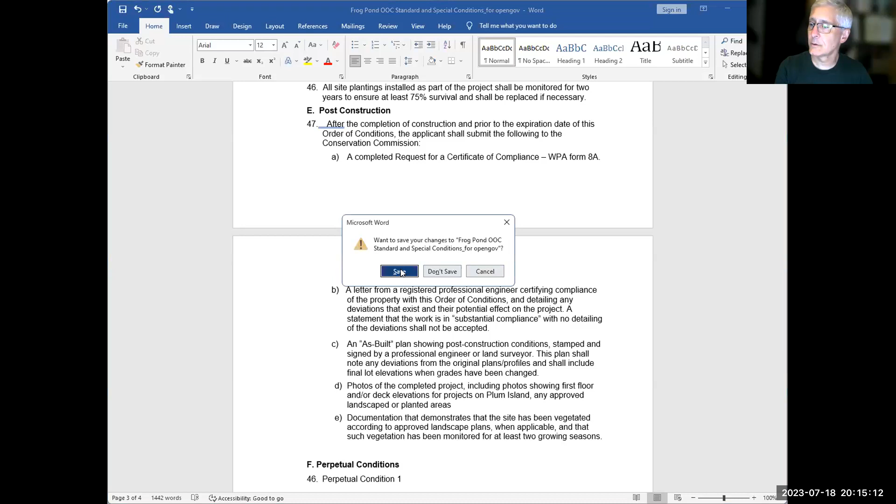That's pretty much it, unless somebody has some new business they would like to discuss. I had just one question. I think at the last meeting we talked about finding out who in the city was responsible for the landfill. I guess the solar people have backed out.

I did talk with Andy about that after our last meeting, and he said it's a good question, we need to take a look at that. He was going to bring it up. We are trying to schedule a meeting with the mayor, because it involves the lawyers and any other issues that may be coming up around the landfill. So he wanted us to discuss that at one of his meetings with the mayor. We just haven't done it yet, but I will remind him.

If you have any photos, Steve, I'll go out there and try to take some pictures of the site. I haven't been out there in a while, so if you have anything you can send me that would help. I don't have any pictures, but I can certainly go down there and take some. No worries, it's on my agenda to do that, and I did talk with Andy about it, so it's going to come up.

There's also that vernal pool right next to the recycling center that, in theory, they're supposed to be maintaining and keeping free of Phragmites. That hasn't been done for years. In theory they're supposed to have done a lot of things. I'd say that's probably as much as we would love that to be on their list.